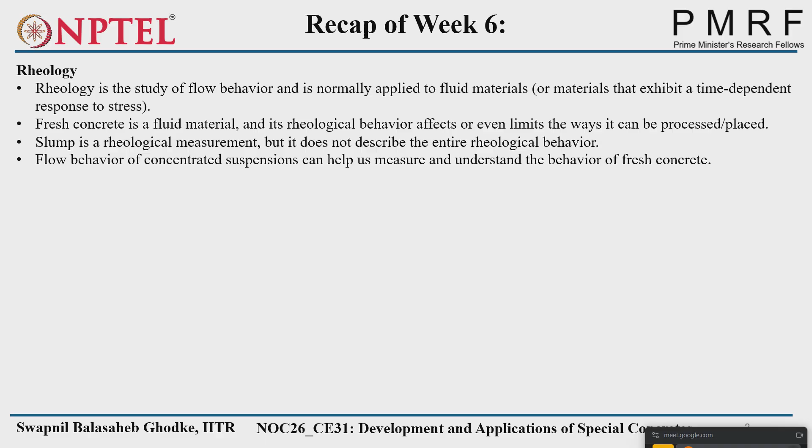So flow behavior of concentrated suspensions can help us measure and understand the behavior of fresh concrete. So how do we measure the flow of concrete or its rheological properties?

Flow is typically measured using the shear parameters of stress and strain rate. Shear parameters mean whatever cementitious material we have will provide some rotation or shear torque over it. That is called the strain rate, and we measure stress - what stress is required to break down the internal bonding - which we normally obtain from direct viscosity measurement, torque, and flow rate in rheometers.

So viscosity is a representative parameter used to assess flow behavior, and it is defined as the ratio of stress to strain rate. Once we get the torque and strain rate values, these are the raw data obtained from any type of rheometer.

Once we plot that data, we use some equations, called transformation equations, with the help of the Bingham model, Herschel-Bulkley model, or modified Bingham model. With the help of these, we calculate the yield stress and plastic viscosity.

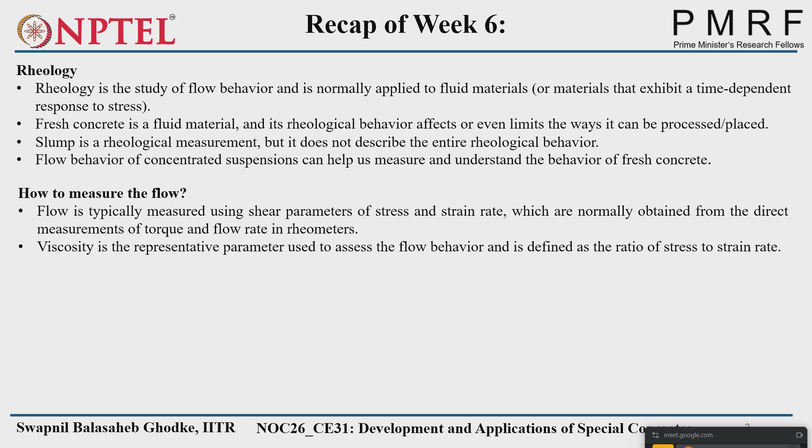And what is the plot we have? Stress versus strain rate - the slope of that plot indicates the viscosity, also called plastic viscosity. It is the resistance to flow.

We saw why we have to understand this in the case of self-compacting concrete, because we require deformability of the paste, while at the same time we require adequate viscosity which will resist segregation of the material. That's why rheology is a very important part of self-compacting concrete as well.

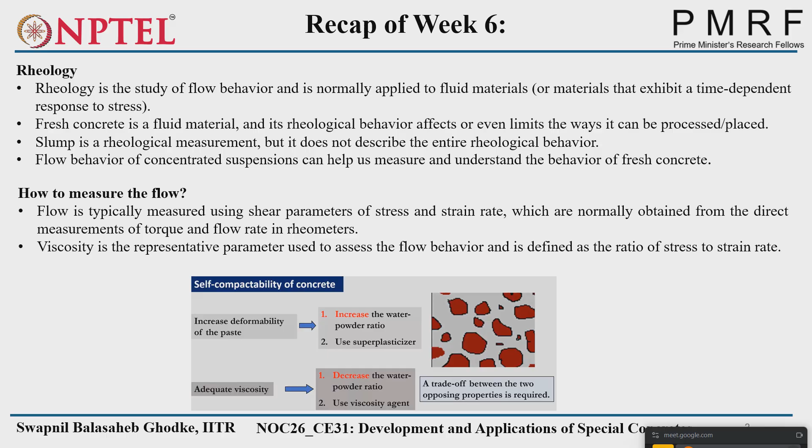How much amount of coarse aggregate, and what size of coarse aggregate we can use in flowable concretes, has been found out with the help of this type of test. In this test, especially near the reinforcement bars, how concrete will flow and how it will block due to obstruction of flow - that we find out with the help of this test.

One cylinder will be there, having a diameter of 100 mm. There is a type of piston which will have a certain diameter of holes, such as 5 mm, 10 mm, and 15 mm. Whatever type of aggregate we are using, we can use that type of hole in the piston. We have the mortar in this cylinder.

We press the piston and see how easily the mortar flows through the holes. This tells us whether the amount of fine or coarse aggregate is sufficient or flowable through the mix. When the mortar is not flowing through the piston's holes and is blocking them, that indicates the coarse aggregates are blocking the flow. That's the possibility of blocking, related to sand volume.

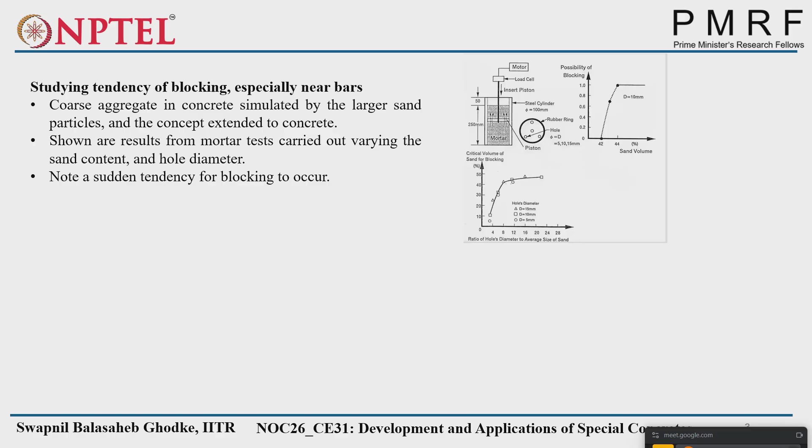Another test is water retention. We saw the slump cone, right? What are the dimensions of the slump cone?

Bottom diameter is 200. Top height how much? 300. Top diameter? 100. Top is 100, bottom is 200, and height is 300 mm. That is our original slump cone.

This is what we call the mini slump cone. It has a top diameter of 70 mm, bottom diameter of 100 mm, and height of 60 mm.

So what we'll do is the same procedure. We put this platform into the center, pour the material in without compaction, and lift the mini slump cone. The automatic flow of the concrete over the surface is allowed. Then we measure the larger diameter first, then perpendicular to that another diameter, and get the average of that diameter.

Then we have to calculate the relative flow area. Based on the average diameter from the flow, we calculate the final area. We know the initial diameter is 100 mm, which gives the initial area. So final area minus initial area, divided by initial area, gives the relative flow area, without providing any compaction or blows to the table.

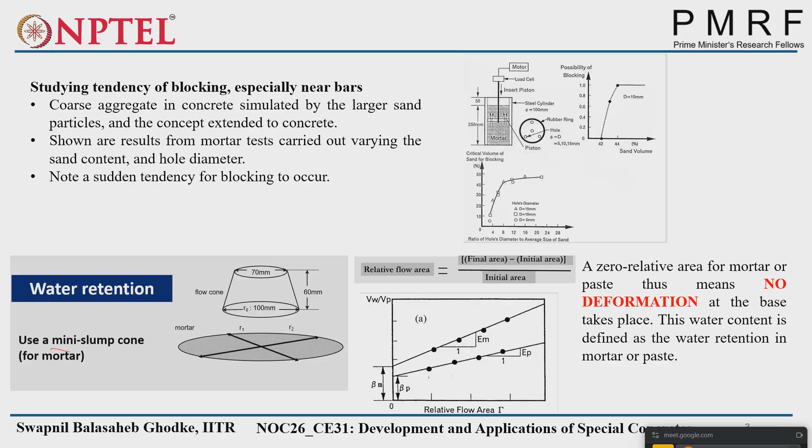One is understanding the amount of sand content and coarse aggregate content, and another is how to identify the water retention of the mortar mix.

Basically, the flow behavior of any cementitious system is a suspension of cement. Suspension means solid particles are either dispersed or flocculated. Dispersed means there is a certain amount of distance between each particle, and flocculated means the particles are closely bonded together.

If you consider the volume of solid particles as Vs, when the volume of solid particles increases, automatically the crowding of particles increases, which increases the viscosity.

Suppose you have 100 ml of water and 5 grams of cementitious particles in one beaker, and another beaker with 100 ml of water and 100 grams of cement. Which one will have the higher amount of viscosity?

Which beaker fluid will have the higher viscosity? The one having a higher amount of cementitious content. Here I am giving the example of cement content, but for any type of solid particle, if the concentration is high...

...it will be responsible for higher viscosity, because a large amount of force is required to get flow, or a large amount of resistance is available to the flow. Viscosity is basically a resistance to flow.

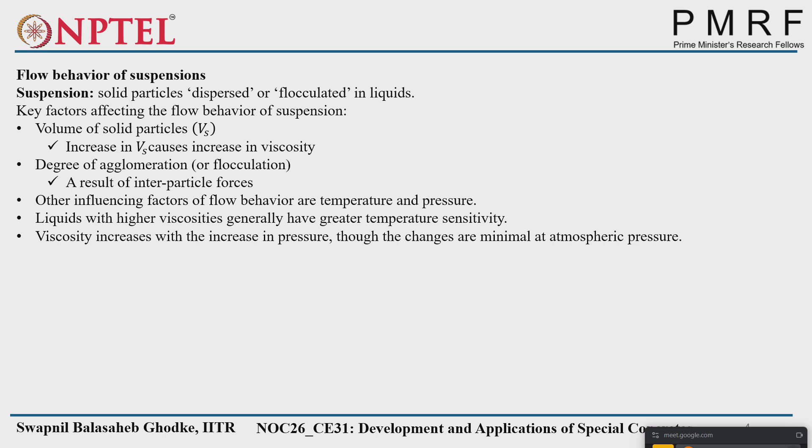Then flocculated suspensions - which type of suspension do we call flocculated? Particles smaller than 1 micron in diameter could result in aggregation or gel formation.

In the case of flocculated suspensions, internal forces are fairly weak, and the stress at which breakdown of the flocculated network occurs is called yield stress. So in which case are the internal forces fairly weak? Which type of force, which type of bonding?

Van der Waals force bonding. You can read more detail about which one? Hydrogen bond.

Yeah, but hydrogen bond is not possible in this case. Most cementitious particles are bonded either by van der Waals force or, due to hydration, through CSH bonds, which are chemical bonds.

And another important sentence is that the stress at which breakdown of the flocculated network occurs is called yield stress. Whatever we measure from the rheometer, that yield stress is basically the breakdown of flocculated networks.

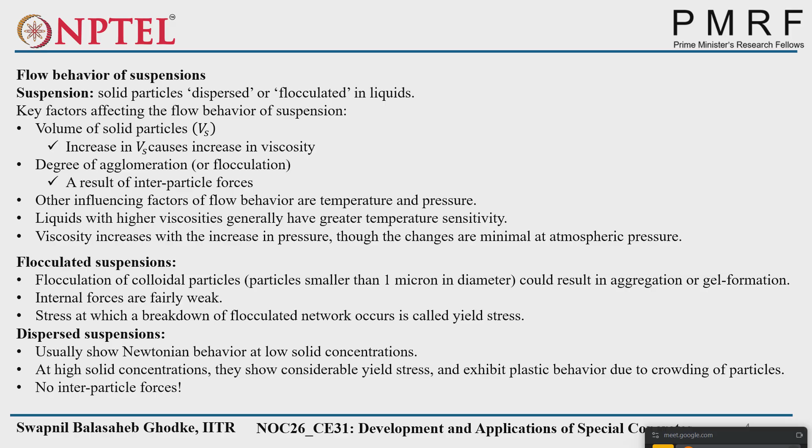In the case of dispersed suspensions, the distance between the particles is high. That's why no interparticle forces are available. So basically, we have to understand the difference between flocculated suspensions and dispersed suspensions. In flocculated suspensions, bonding is there, but it is weak bonding. In dispersed suspension, there are no interparticle forces available at all.

Further, in the case of cement pastes, a dispersed system, if it has higher solid concentration, it is a non-Newtonian system. What are the physical factors that affect it? Water cement ratio, cement grain shape and size, chemical factors, cement composition and its structure, modification due to hydration, mixing and measurement conditions. Can anyone tell me what happens if water to cement ratio increases? What will be the response of the flow in aspect of yield stress and plastic viscosity?

Right, because flow will be more, obviously resistance will be less, so yield stress and plastic viscosity will get decreased. Because of the higher amount of water, whatever solid concentration is already there will convert to dispersed medium, so yield stress will be less. So increasing the water to cement ratio, both parameters will get decreased.

Similarly, cement grain shape and size. Finer the material, higher the hydration mechanism will happen. Irreversible breakdown will be possible. That's why very fast setting will happen, and that's why yield stress will get increased, plastic viscosity will also get increased. Cement grain shape depends on whether particles are spherical or cubical.

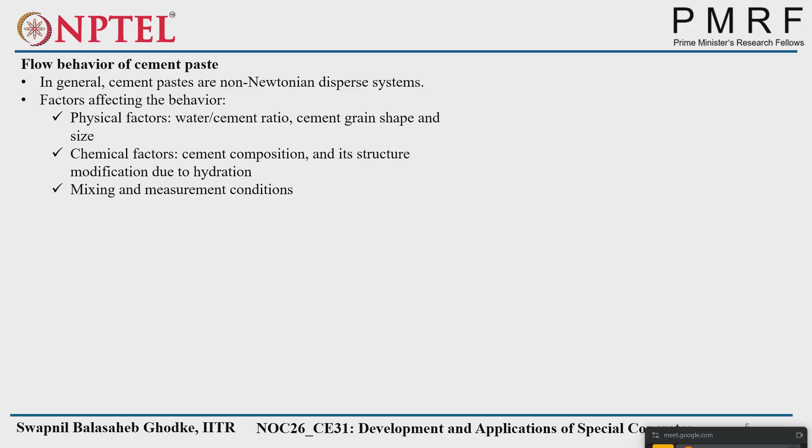Similarly, mixing - if you are mixing the same proportion of mix with a 100 RPM concrete mixer, and then mixing the same material with 200 RPM, both materials will show different rheological behaviors, because shear history is different. Shear history means whatever mixing you are doing, shearing of the material - if mixing with higher speed, there is a possibility of higher hydration or higher heat generation. That's why the material will get stiff as early as possible and show higher yield stress and plastic viscosity at the time of testing. So both parameters are very important: mixing as well as measuring conditions and measuring equipment.

Further, normally assessed using shear rheometers generally operating in rotation. They rotate, giving the shear, and measure the torque and rotational speed as raw data as a result. Then we plot that data and go for further analysis.

Two fundamental types of rheometer are generally used: coaxial cylinder and parallel plates. The sample generally sits in the gap between these two types of equipment. Rheometers either control the stress and measure the strain rate, or control the strain rate and measure the stress.

This type of arrangement we are also using in one of the equipment in testing. Can anyone guess what is that equipment? What does the rheometer actually do - it controls the stress and measures the strain rate. Then another aspect is controlling the strain rate and measuring the stress.

Similarly we can do in CTM. If you remember, we have load control and displacement control, right? In the CTM also we will do load control test or displacement control test. Here it is similar - stress control and strain control. In a similar manner, or similar mechanism, we can use it.

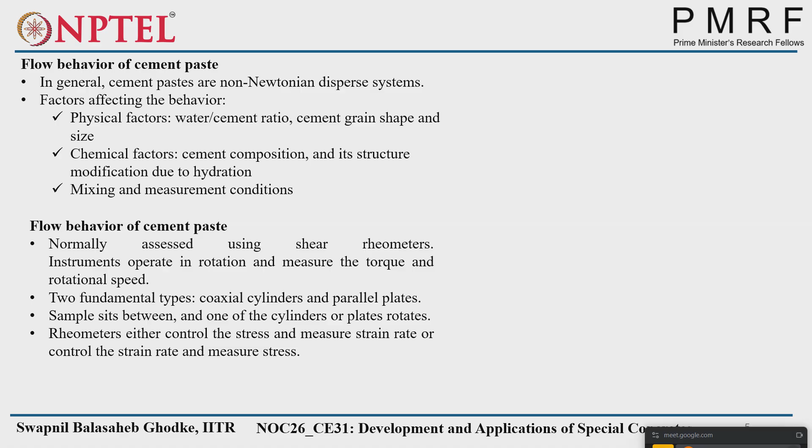These are the two types of rheometer. The coaxial cylinders - this is the gap between the cylinder and the cylinder. This is the one of which rotates, either the outer part will rotate or the inner cylinder will rotate. And this is the torque measuring device.

Similarly, these are the two plates above each other. There is a gap between the two plates, and this black part is the material between that gap. So the shearing of the plates measures the torque and rotational speed.

If we have a stiff material and a little bit flowable material, in which type of rheometer can we use the stiff material, and in which type can we use the flowable material? Can anyone answer?

This is the parallel plate rheometer, two plates above each other, with a gap between them. If we are having too much flowable material, it will not be able to stay in between the plates. So a little bit stiff material we can have between the parallel plates. Whatever stiff material, if you want to measure the rheological properties, we can use the parallel plate. For too much flowable material, we can use the cylinder type or coaxial type of rheometer.

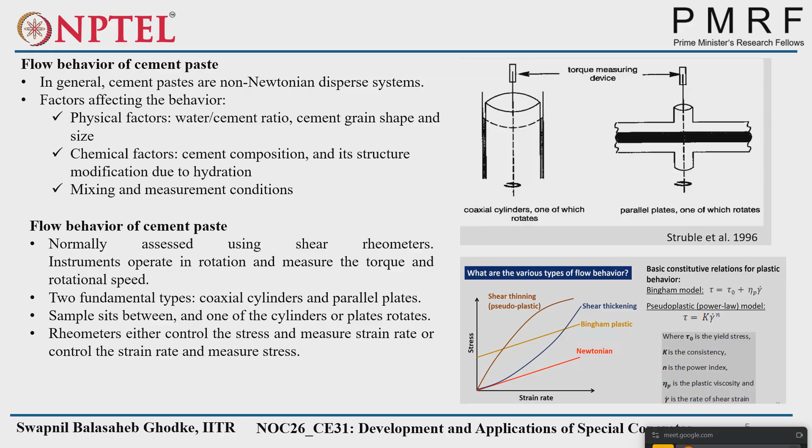So what is pseudoplastic behavior? Shear thinning behavior, we saw in the last plot - pseudoplastic behavior is a shear thinning behavior. And what do we call this one - shear thickening behavior, what is it called? Anyone remember from fluid mechanics? Dilatant behavior - that's what it's called, dilatant.

When we are using a superplasticizer, cement paste shows Newtonian behavior at low concentrations and plastic behavior at high concentrations. So what does superplasticizer do? We saw in the previous 2-3 lectures also, we've been seeing superplasticizer uses since the first week. Can anyone tell me, when we are adding water into the cementitious matrix or any concrete matrix, it will start the hydration, it will start the mixing process. So what will happen when we are adding the superplasticizer? Anyone?

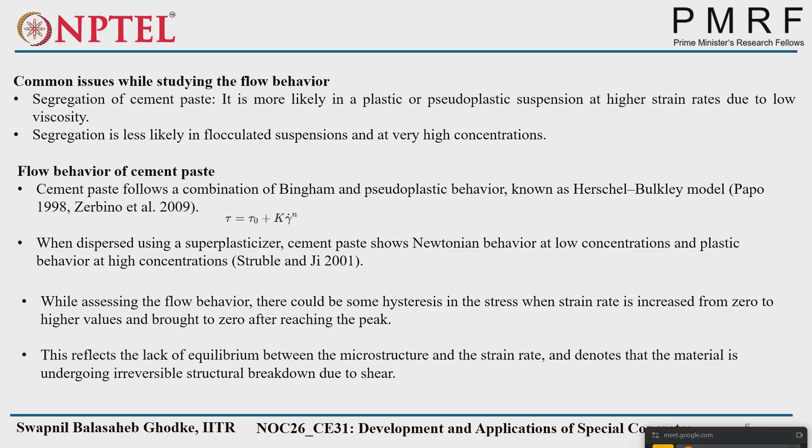So we saw cementitious paste. What about concrete? Flow behavior must be described using yield stress and plastic viscosity due to its Bingham nature.

In the case of concrete, due to the coarser particles, there is a possibility for them to settle down due to gravity, and segregation is more likely to happen during shear. Because as the concrete is sheared or shear rate is applied, there is a high possibility of segregation. That's why another problem is slip.

We have the container. If you saw in the last video, we have a large container, and we are providing shear through the vane shear.

When we are providing the vane shear, there is a possibility that the material, if it is stiff, totally rotates. If it is not rotating inside the material, the whole material rotates against the cylinder. That's why surrounding the cylinder there are strips called aggravated strips. These strips will not allow the whole material to flow or rotate into the cylinder itself. Only the part of the vane which is rotating will break down the material.

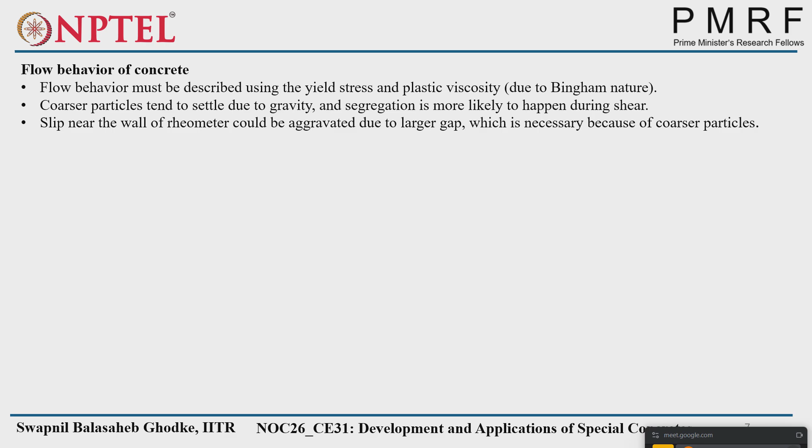So these are the problems observed in concrete. That's why we have to provide the minimum shear rate in the case of concrete, which will mimic the actual procedure or actual protocol of mixing.

Because in concrete there is a wide range of particle sizes used, there is a more complex nature of behavior we observe. So flow depends on the concentration of particles, and the extent of flocculation of cement particles. Flocculation is only important in the case of cementitious particles. It will not happen in inert particles such as fine aggregate or coarse aggregate.

The ranges of strain rates during testing should be low to simulate actual field conditions: mixing, transporting, placing, and finishing. Very important sentence. Why do we have to go for low strain rate? Because at high strain rate, there is a chance for coarser particles to settle down. So that's why we go for low strain rate, and it also simulates the actual field conditions of mixing, transporting, placing, and finishing.

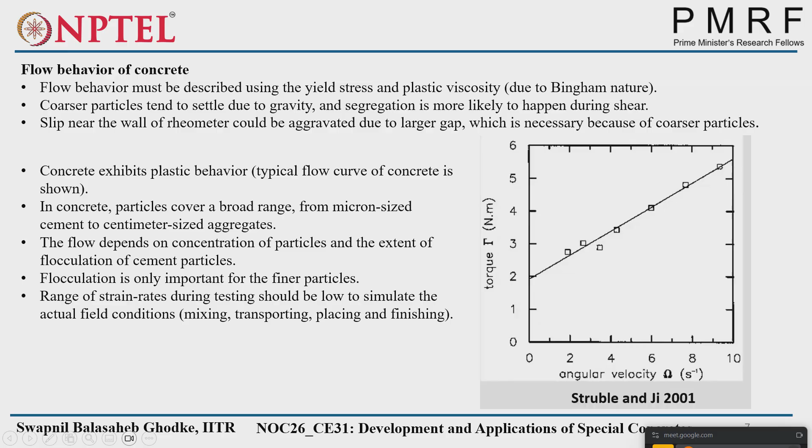So apart from that, what are the different types of factors affecting water to cement ratio? Increasing the water to cement ratio results in lower yield stress and plastic viscosity. This is because of the dispersion of particles, trapped water gets released, which is responsible for increasing the flow, and due to increasing flow, yield stress and plastic viscosity get decreased.

Second, total aggregate content. Increasing total aggregate content results in increasing plastic viscosity. Can anyone tell me how it's possible that aggregate content increases plastic viscosity? Anyone?

Okay, second one: concrete with river gravel, due to its much rounded and smoother surface, has lower viscosity and yield stress. Now you can read both sentences, and tell me how it increases the plastic viscosity.

See, one factor is the concentration of coarse aggregate particles. If the concentration is very high, more force or more resistance will be there for the flow, and less amount of mortar will be available which can carry those coarse aggregates with the flow. So that is called increase in plastic viscosity due to the concentration of coarse aggregates.

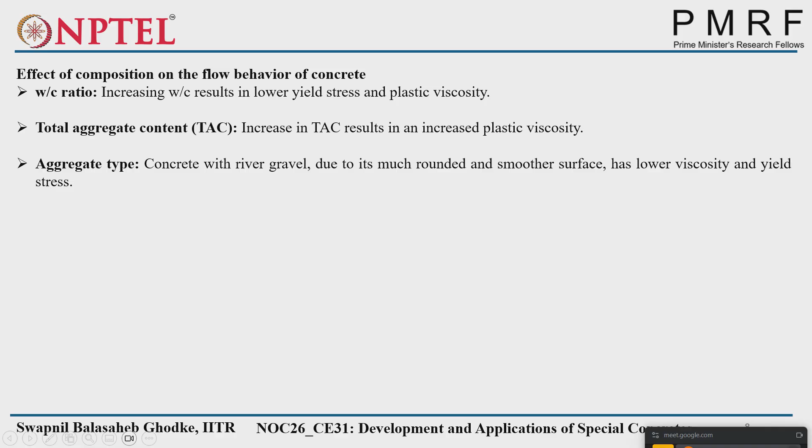But instead of rounded particles, if you use angular coarse aggregate, what will happen? That will create internal friction, because interlocking happens between angular particles, and this increases the plastic viscosity due to internal friction between coarse aggregate particles. So the main reason is interparticle friction causing increase in plastic viscosity. Rounded particles are easier to flow since they have less internal friction. That's why lower viscosity and yield stress occur with river gravel and rounded, smoother surface particles.

Sand content: both yield stress and plastic viscosity follow an initially decreasing, then increasing trend with increasing sand content. The lowest yield stress and plastic viscosity occurs for a sand content of 38%. Now, this statement is totally subjective, because depending on the type of sand you are using, whether it's 38% or more or less, this observation, according to this paper, is based on whatever sand they used for that purpose only, they observed 38%.

But if you are using different types of sand, with different gradations, your value may vary, and the result will also vary for the yield stress and plastic viscosity parameters.

Admixture: fly ash reduces both yield stress and plastic viscosity. We saw several times because fly ash is circular or spherical in nature, so that is responsible for increasing the lubrication and increasing the flow. That's why it reduces yield stress and plastic viscosity.

Super plasticizer and elapsed time - as we are keeping the same material, suppose now one more study is there in the rheological aspects. You have the concrete or cementitious material at the same rotating speed or shear rate, and you are checking their yield stress at 0 minute after directly mixing the material, then 5 minute, 10 minute, 15 minute, 20 minute, 25 and 30.

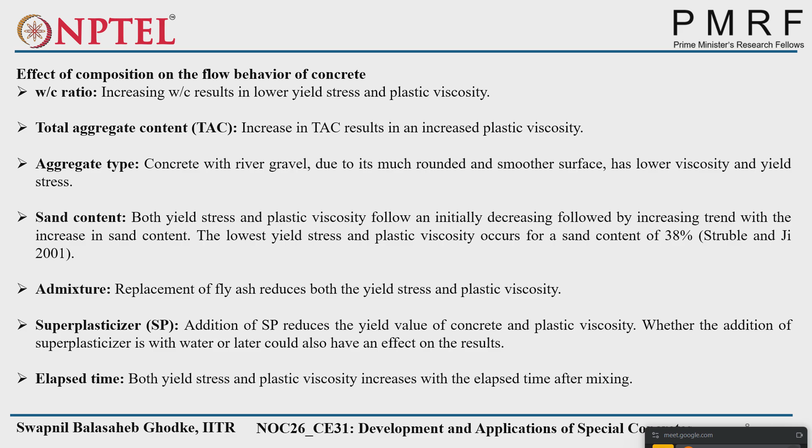So I hope you have understood up to this one, the rheology part. This is the brief introduction of the rheology part. Then we'll move forward with fiber reinforced concrete.

Most of you are well known about fiber reinforced concrete, because nowadays it is very popular. People are using fiber reinforced concrete. So why do we have the need of fiber reinforced concretes? Because our concrete has relatively low tensile strength and low energy consumption capacity, that is called toughness. Can you tell me what is the tensile strength value?

We have a certain relation with respect to the compressive strength in the code. Anyone remember? 5000 under root of FCK - that is Young's modulus, na? Okay, 0.7 root FCK.

And another thumb rule is also there. What is it called? How much is it? One tenth of the compressive strength - you will find this thumb rule actually. We call it the tensile strength of our concrete matrix.

So these are the two problems: already we have one tenth of the tensile strength compared to compressive strength, that is very low, and low energy consumption capacity. So why do we need tensile strength and why do we need energy consumption capacity, that is called toughness? Because if you want the concrete to behave perfectly into the flexural condition as well as into the earthquake loading condition, that is the ductility point of view, we need these parameters more efficiently - tensile strength and toughness.

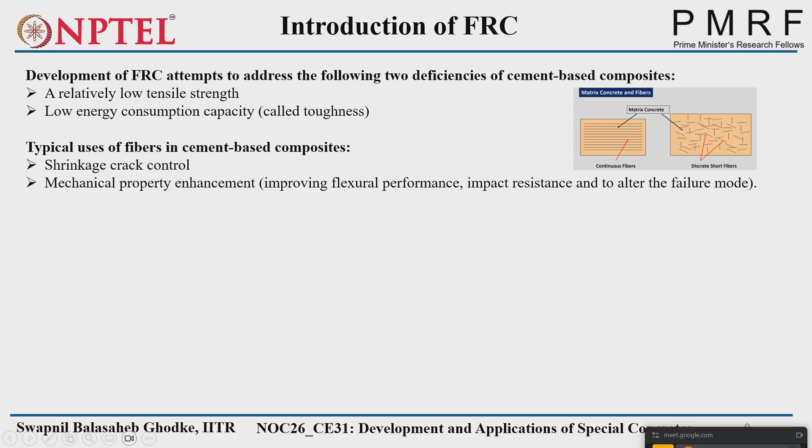So what do fibers do? Fibers may be continuous long fibers, or short fibers which can disperse into the concrete matrix in a random orientation. Typical use of fibers in cement matrix: mainly shrinkage control or shrinkage crack control, mechanical property enhancement, improving flexural performance, impact resistance, and altering the failure mode. It's very important - it alters the failure mode. We'll see how it alters.

So what is the difference between fiber reinforcement and conventional reinforcement? Fibers are generally distributed throughout the concrete, whereas reinforcing bars or wires are placed only at predetermined locations, because bars provide only tensile locations, the tensile zone of the concrete. Suppose we have a beam - we have the compression zone at the top and tensile zone at the bottom, so most of the bars will be at the bottom part of the beam. Forget about curtailment and such things, just consider we have bars at the bottom.

We don't - if we are doubly reinforced, even though we have a less number of bars at the top and a large number of bars at the bottom. But what happens if you are using fibers? They completely disperse throughout the concrete matrix and improve the mechanical property. Fibers are generally short, discrete, closely spaced, and randomly distributed throughout the matrix. Presence of fibers in concrete modifies the properties of the concrete. This is quite in contrast to reinforced concrete, because reinforced concrete does not modify the properties of concrete - it only modifies the tensile behavior, or resists flexural forces.

It will give the flexural strength to the concrete. So obviously, it is possible to have fiber reinforced concrete used as a part of conventional reinforced concrete, meaning you can use them together. You have the bars also, and you can use the fibers also.

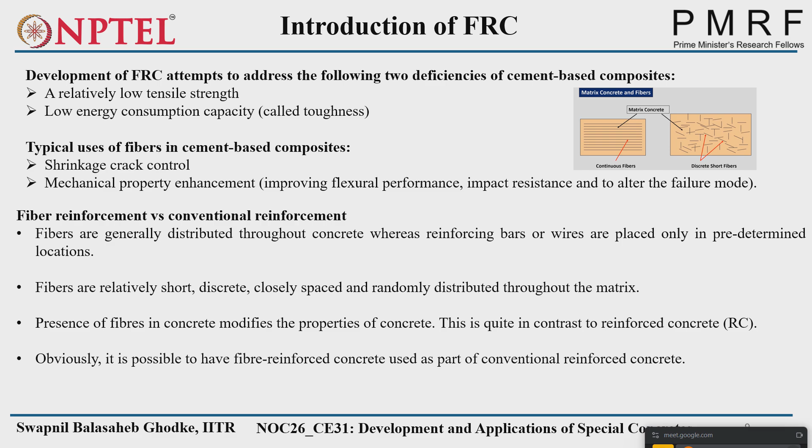So more effective use of fibers. The main factors that control the performance of the composite material are physical properties of the fibers and matrix, and strength of bond between the fibers and matrix. Physical properties mean length, diameter, type of the fiber. We have to understand these, because all types of fibers will not behave equally or show similar performance or efficiency in the concrete matrix. So that part we also have to consider.

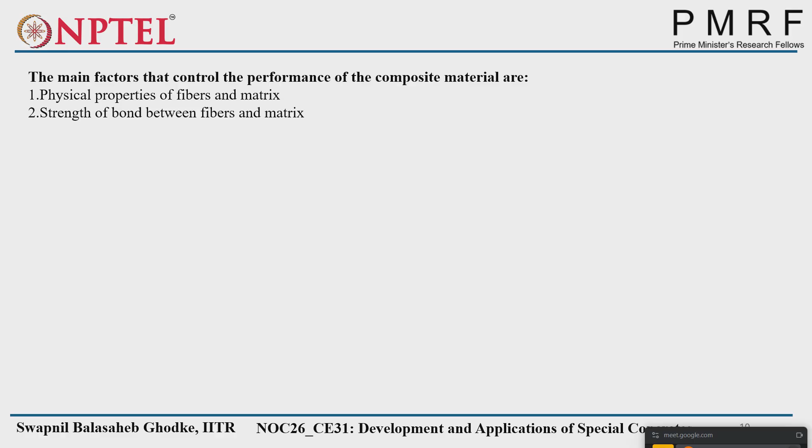Strength of the bond between the fibers and matrix: we'll see how we'll measure the strength of the bond. That is also important, because if you have a fiber in the concrete matrix, maybe you are aware of the pull out test. We'll do it for the concrete rebar, steel rebar, to see the bonding between the rebar and the concrete matrix. In a similar manner, we also have to understand how the bond is observed between the fibers and the matrix, because fibers are short and small in diameter. That is very important to understand the bonding properties between the fiber and the concrete matrix.

Another aspect is the fiber volume ratio. If the fiber volume is low, moderate, or higher, that also affects the properties of the concrete matrix. So what is the fiber volume? It is the ratio of the fiber volume VF to the total volume of the FRC, that is, fiber reinforced concrete.

At low VF, fiber volume, the addition of fibers contributes mainly to the toughness. And at a higher VF, the tensile strength of the matrix can be enhanced and the failure mode can be changed. How much lower and higher the value is, we'll see in the next slide.

Can anyone tell me what is toughness? Actually, what does it indicate in the load deflection graph? Anyone? Right, it is represented as the area under the load deflection curve.

But up to what point, that we'll see. We cannot get the whole area. We'll calculate up to a certain displacement or certain deformation point. Up to that point only we'll measure the area under the load deflection curve, and that is what we call the toughness of that particular concrete matrix.

So the properties of the matrix influence the bond with the fibers and the mechanical properties of the fiber reinforced concrete. Obviously, if we have different types of material constituents, we'll have different bond properties. That's why FRC can be modified using mineral admixtures such as fly ash, silica fume, and metakaolin, because these mineral admixtures are responsible for giving strength to the matrix. Whatever pores are there, even surrounding the fibers, will be filled with additional CSH gel and will give more bonding. That's why mineral admixtures are recommended for use in fiber reinforced concrete.

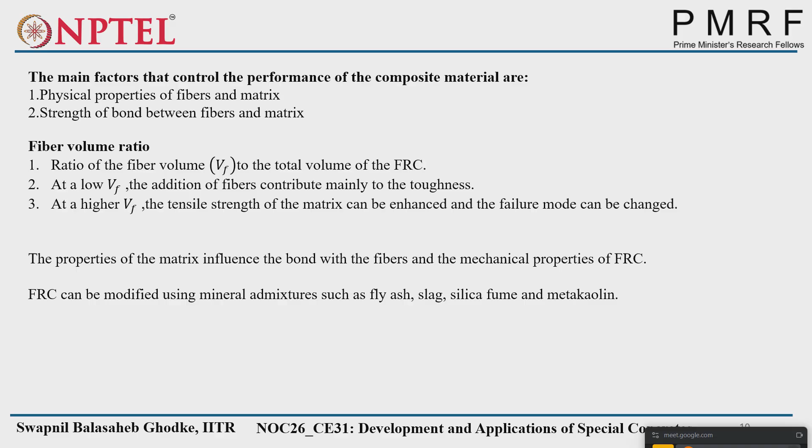So, classification: I am discussing the classification. Low fiber composites are called so if fiber content is less than 1% of the total concrete matrix, and that is mainly used to reduce shrinkage cracking. If the fiber volume is between 1 to 2%, that is called moderate fiber composites, and it exhibits improved mechanical properties and can be used as a secondary reinforcement, meaning you already have the rebar reinforcement, and this fiber is called the secondary reinforcement.

In the case of high performance fiber reinforced concrete, if the volume fraction of fiber is higher than 2%, it not only improves the mechanical performance, it exhibits strain hardening behavior due to high fiber content, generally more than 5%. Does anyone have any idea about strain hardening and strain softening behavior?

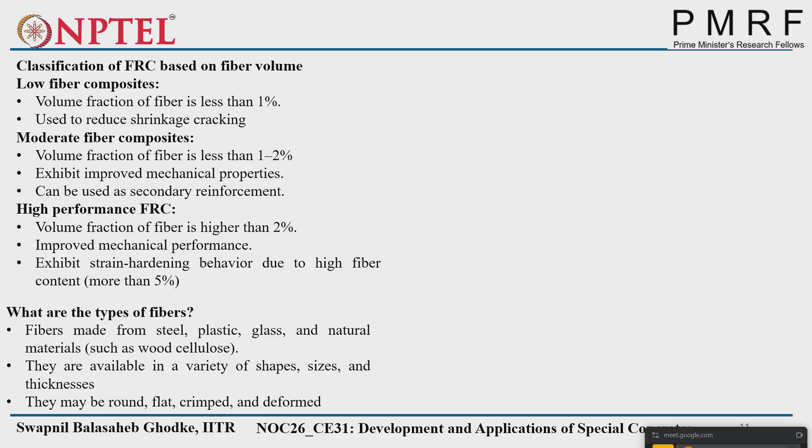We'll see strain hardening and strain softening behavior. So what are the types of fibers? Steel, plastic, glass, and other natural materials such as wood and cellulose. They are available in a variety of shapes, sizes, and thickness. They may be round, flat, crimped, and deformed.

So, these are the concrete aggregates. Suppose these are the voids, and these are the fibers. You see, these are randomly oriented. So voids and microcracks serve as the crack initiators. That's why we have to be careful about the voids, the amount of voids. Less the amount of voids, less the possibility to have microcracks or crack initiators.

Fiber presence prevents crack elongation and increase of crack width, increasing strength by the fiber spacing theory. Suppose you have voids, and you have one fiber from this side and one fiber from this side. This void allows a certain amount of widening because of crack initiation, up to this point, so it reaches here and here. Further widening will not be allowed by this arrangement of fibers. But what happens if you have voids here and only here you have the fiber, with no fiber on this side? If it is widening, do you think it will be resisted by the fiber?

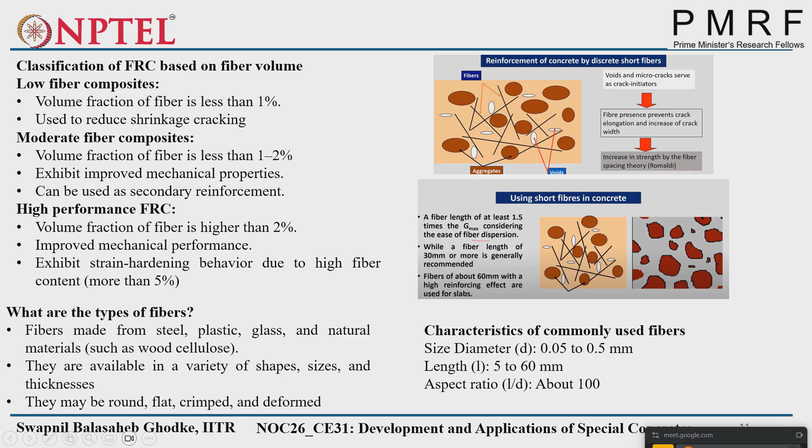So what are the common characteristics of the fibers? Diameter 0.05 to 0.5 mm. Length will be 5 to 60 mm. Aspect ratio is one of the major important parameters, called the length to diameter ratio of the particular fiber, and that will be about 100.

Now we'll see the bonding mechanism. This is the fiber, this is the concrete matrix. Half of the fiber is embedded into the concrete matrix, that we call L by 2. This is the diameter of the fiber, and this is the total length L. This is tau, the stress generated surrounding the fiber, in Newton per mm square. This is the surface area, calculated as pi d into L by 2, which gives us the force.

The tensile force you are applying is sigma into pi d square by 4. If the tensile force is more than this resisting force surrounding the fiber, tau into pi d into L by 2, then debonding will happen. If the resistance is more, breaking of the fiber will happen — that's called failure by fiber in tension. When resistance is more and tensile force is less, the fiber in tension will fail. But if resistance is less and tensile force is more, the interface bonding will fail, debonding will happen, and there is a rare chance the concrete itself will fail. So this is the tensile force and this is the resistance force, where sigma and tau are the tensile strength of the fiber material and the bond strength between the fiber and the matrix respectively.

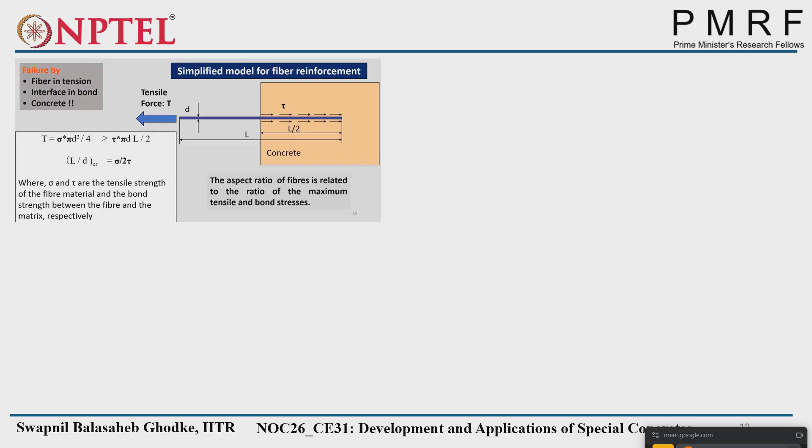You have to find out the bonding-debonding properties of the particular fiber. That's why if you see steel fibers, they will have some hook at the bottom or top, or an alternate zigzag pattern arrangement. It is rare to use a simple linear fiber. Similarly, in rebar also you will have TMT rebars, which gives additional bonding with the concrete.

What are the advantages and disadvantages of fibers? Since fibers are generally distributed throughout the concrete, many fibers are inefficiently located for resisting tensile stresses. That's why distribution is very important. Spraying the fibers leads to 2D random orientation, whereas pre-mixing them during batching leads to 3D random orientation. Spraying means after the concrete is prepared, we spray fibers over it and mix with a spatula or similar tool. Pre-mixing means we mix with the dry materials itself, which gives 3D random orientation.

The efficiency factor to take care of stresses depends on the fiber length, critical embedment length, and orientation. Critical embedment length is shown here as L by 2. Suppose there is no debonding possible for a fiber with L by 2 embedment length, and we provide another fiber in the same concrete matrix with L by 4 length.

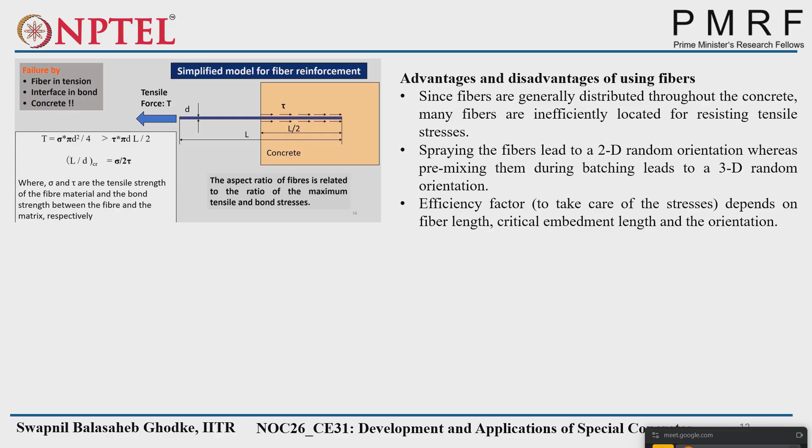So which one will fail, or will it also resist debonding? We have one fiber with L by 2 length and another with L by 4 length—which will fail in debonding? Obviously L by 4, because whichever has less embedment length or critical embedment length will fail first—debonding happens easily, easy to pull out. Even in labs, in the normal rebar debonding test, if the embedment length is less, debonding happens easily. It is similar for fibers.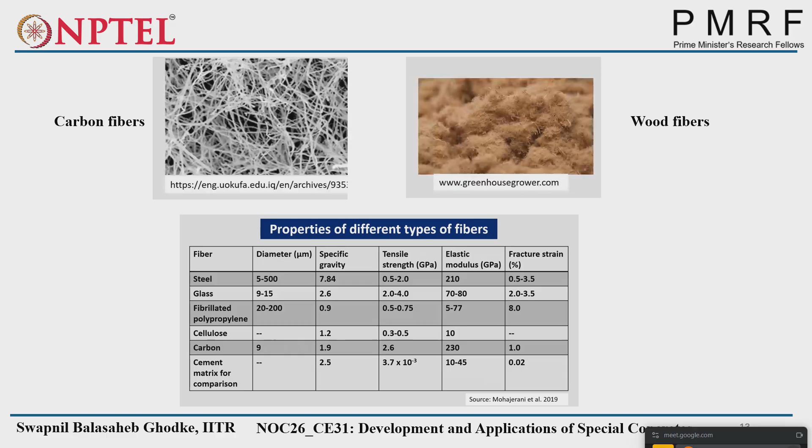So this is the general idea about fiber reinforced concrete. Now we'll see that in most constructions, we are using steel fibers.

Can anyone tell me, since we are using steel fibers, is there any possibility of corrosion of the steel fibers? Why? Right, because we have alkali present in the concrete matrix due to calcium hydroxide. Because of that, it creates an oxidizing layer surrounding the steel fibers, which does not allow direct contact with weather or water. That's why it provides some protection against corrosion.

So, steel fiber reinforced concrete: addition of fibers reduces the workability. It's very important when using fiber content that you modify your mix accordingly. How do we modify it? Because it reduces workability. Why does it reduce workability? Any idea?

It reduces workability because the overall specific surface area increases due to the fiber length and smaller diameter. As area increases, more mortar is required to coat the surrounding matrix and fibers, and to get them into the flow along with the matrix. So higher cement content, water, and sand content are required for the same consistency compared to normal concrete.

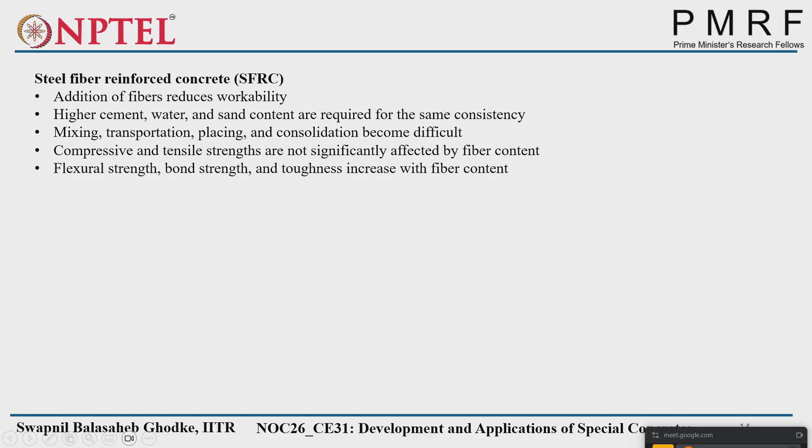The mix should be sufficiently cohesive to hold fibers without segregation. Sufficiently cohesive means higher fineness should be there, which can carry all the fibers - similar to how higher fineness is required to carry coarse aggregates along with the concrete matrix. Similarly, higher fineness and higher consistency are required to carry the fiber matrix along with the concrete matrix, so that no segregation happens between the fibers and the concrete.

Fibers increase the total surface area of the mix, thereby increasing the demand for fines. For optimal performance, finer material content should increase with the fiber surface area. How much will it increase? The fiber area increases with the fiber dosage and decreases with the fiber size.

Total fine material - the range given is less than 300 micrometers. This is called the total fineness material in fiber reinforced concrete, that is cement, mineral admixtures, and fine aggregates, and it should be at least 400 kilogram per meter cube. We saw this type of range in self-compacting concrete also, where we called it the fineness of material below a certain sieve size.

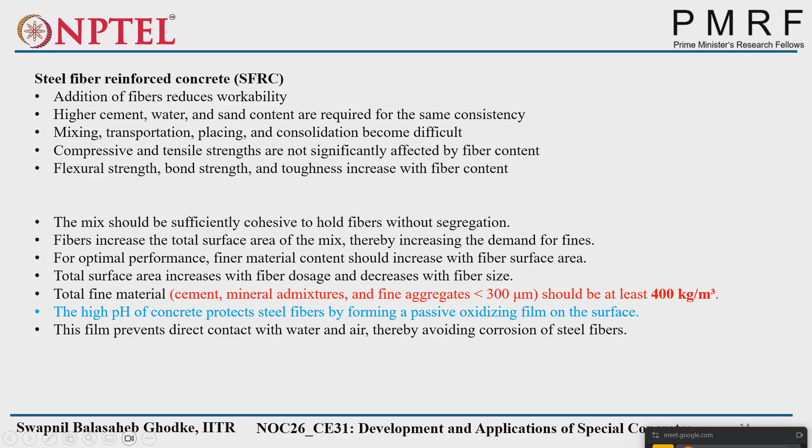The high pH of concrete protects steel fibers by forming a passive oxidizing film on the surface. This film prevents direct contact with water and air, thereby avoiding corrosion of steel fibers.

Some other key observations regarding mix proportioning: aggregate grading should be biased towards the finer side, meaning more fines should be present, down to 75 micrometer. Use natural fine aggregate if unavailable. Improve grading by adding 4 to 8% of crusher fines.

Increasing fiber content reduces fiber spacing, limiting the maximum size and proportion of coarse aggregates. Obviously, increasing fiber content causes more crowding of fibers, so spacing between each fiber gets reduced. With more crowding, if you want to maintain the same consistency, the maximum size and proportion of coarse aggregates must be reduced.

Water demand content increases with fiber content. How much? Approximately 20 kilogram per meter cube per 1% fiber - this is a thumb rule. But it should not go beyond 180 kilogram per meter cube. The range is between 140 to 180 kilogram per meter cube.

Accordingly, we have to make changes to our concrete mix design by using superplasticizers or other admixtures. Water content should be minimized using water reducers and superplasticizers, at about 0.4 to 1.4% of binder.

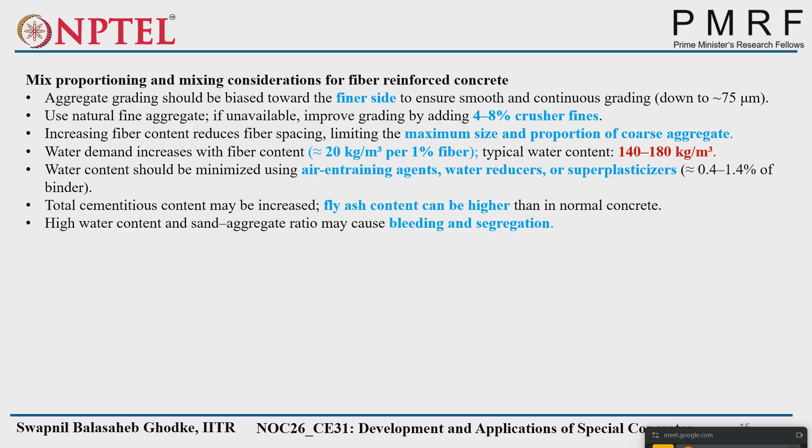For mixing with fiber content of 0.5 to 2%, normal mixing methods can be used with thorough mixing - meaning whatever mixing method we use for traditional concrete, a similar method applies: dry run, then adding water plus SP content together or in a different manner. But mixing time will be higher - that's why it's called thorough mixing, meaning mixing time will be higher.

Mixing energy may increase by 2 to 4 times using forced-action mixers, meaning RPM will be high. Then we have to take care about uniform dispersion of the fibers also - for that purpose, dispensers or bundle fibers with water soluble adhesives can also be used.

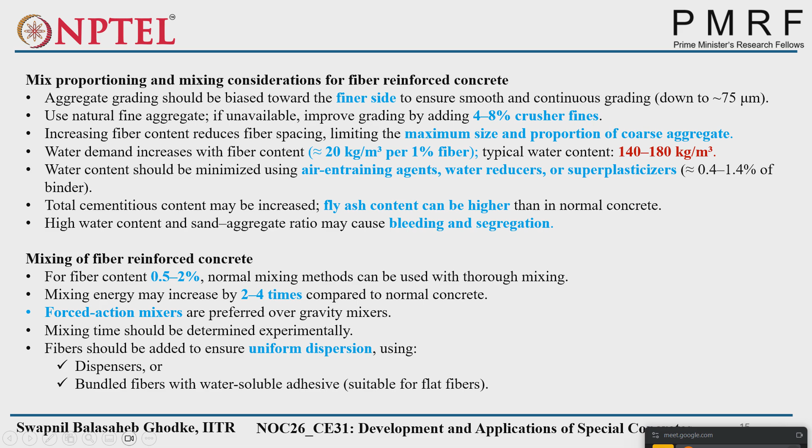Fibers are added in an agitating truck. Concrete should be mixed at high speed so fibers don't settle down - mixing should be higher in agitating trucks. Mixing time for fiber reinforced concrete is typically 15 to 25% higher than plain concrete. Mixing efficiency depends on mixer RPM, wear of blades, fiber type, and dosage.

Longer fibers and higher aspect ratios increase the risk of fiber balling. What is fiber balling?

If mixing will not happen properly, not having the proper mixing speed, there is a possibility to have the fibers settle down. And if the dispersion of the fibers is not proper, the fibers will interact with each other close together and it will create a ball like structure, that is called fiber balling.

Dispersion is very important, and there is higher possibility of balling in the case of longer fibers and higher aspect ratios. Aspect ratio means length to diameter ratio. There is a possibility of fiber balling with longer fibers. That's why there is a recommendation to use short fibers, except in the slab, where only longer fibers are recommended. In other concreting, short and discrete fibers can be used.

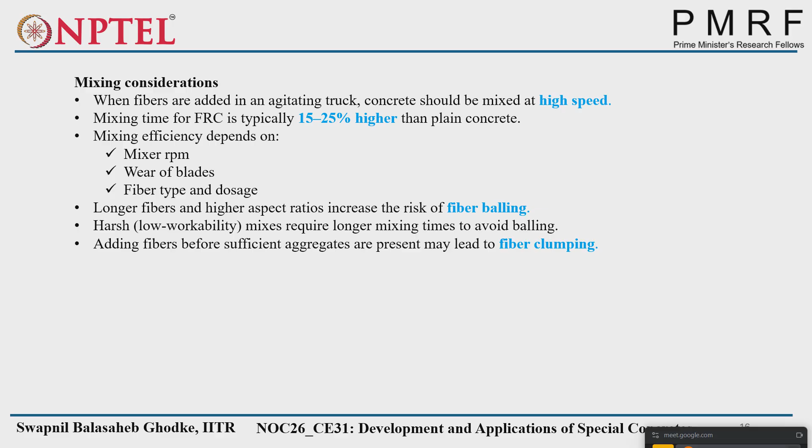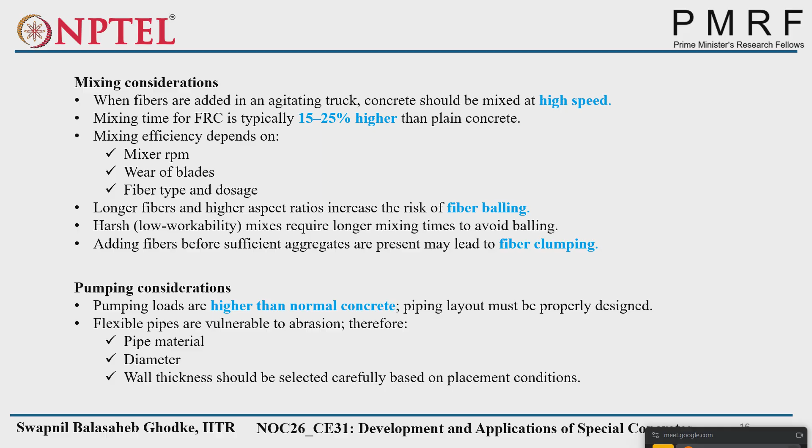For pumping, viscosity will obviously be high because of the fiber content, so pumping pressure will be high compared to normal concrete. The pumping layout may be different because if you are using steel fibers, there is a possibility of wearing and tearing of the pipe. That's why pipe material, diameter, and wall thickness should be selected carefully based on the placement conditions. These are the important factors we have to consider apart from normal concreting, because of the inclusion of fibers.

Then how do we check the homogeneity of the fiber dosage? For that purpose, one test has been recommended. You prepare the mix with fibers, take a known volume of the mix, then use a sieve. You put all of that fresh mix over the sieve, then remove it so the fibers are separated, then dry and weigh them.

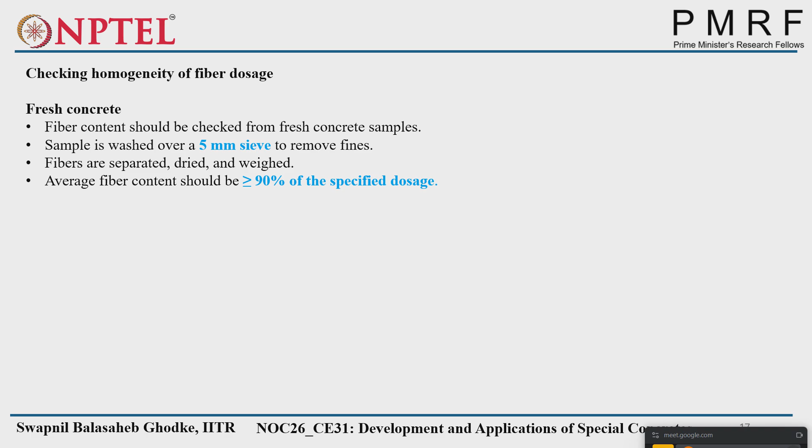Whatever weight you get, suppose you use 1 kg of fresh mix with 1% fiber provided, the average fiber content you get should be greater than 90% of the specified dosage. So for 1%, 0.9% should be there in that fresh mix. Only then can we say the homogeneity of the fiber dosage is good.

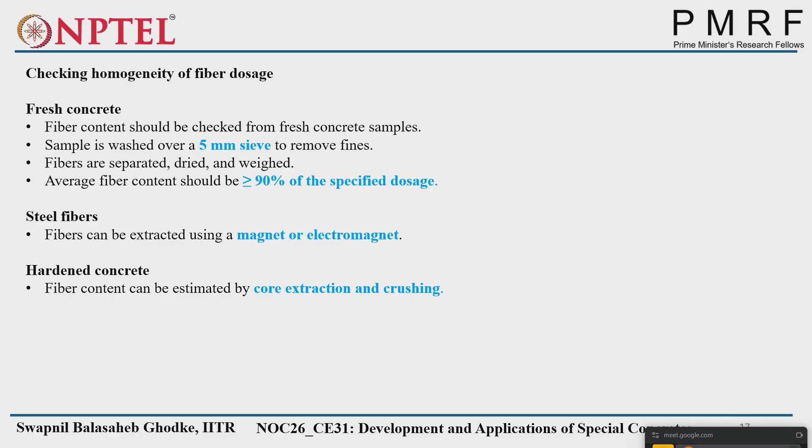Fiber can be extracted using a magnet or electromagnet. This is possible only in the case of steel fibers, which we can remove or get from the fresh matrix. For hardened concrete, core extraction and crushing can be done, then you can weigh and check the average fiber content from that.

So what fiber properties do we ultimately have to see in the hardened state? We saw the fresh properties and mixing. Now we have to see how it behaves in hardened concrete. Mainly fiber reinforced concrete is used with respect to hardened concrete for increasing tensile strength, increasing toughness, and altering the failure mode. Now we'll see how it alters the failure mode.

First of all, we saw that concrete matrix, water cement ratio, maximum aggregate size, and sand aggregate ratio affect fiber reinforced concrete properties. Fiber type, shape, size, length, diameter or aspect ratio, proportion, and fiber orientation and dispersion also affect it.

Similarly, we saw voids are there. If two fibers surrounding the voids are there, that can resist cracking or not allow the widening of the crack. But if the fiber is only on one side of the void, it will not be possible to resist the widening of the crack.

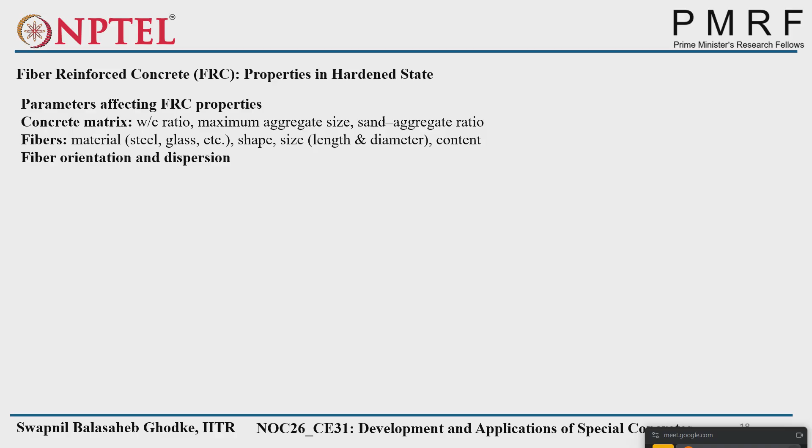In the case of steel fiber concrete, fiber characteristics: length will be 20 to 60 mm, diameter may be 0.3 to 0.9 mm, aspect ratio, that is length to diameter ratio, 30 to 100, fiber content 0.5 to 2% by volume, that is 40 to 160 kilogram per meter cube. Maximum content given is 160 kilogram per meter cube.

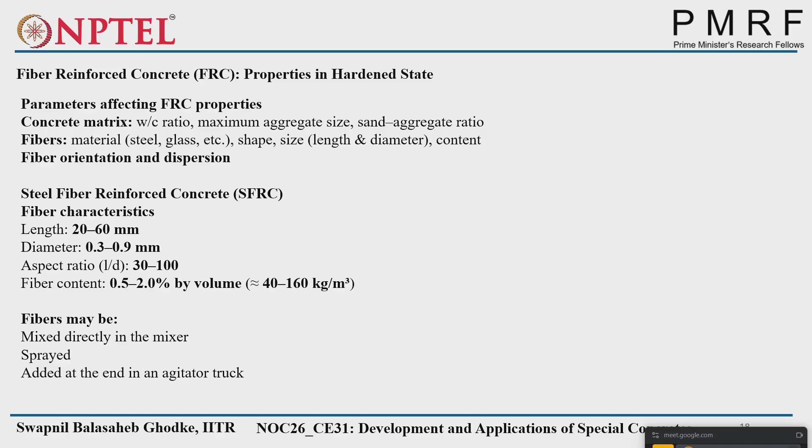Fiber may be mixed directly into the mixer, with dry mixing or spray. But with spray, we have to take care it is properly dispersed and not just on the surface. It can also be added at the end in an agitator truck. In an RMC plant agitator truck, you can add it at the end too, because the mixing speed will be high compared to normal concrete, so it can still properly mix into the concrete.

Workability: addition of fibers reduces workability because of the increase in overall specific surface area. A higher sand to aggregate ratio may be required as fiber aspect ratio increases. Sand to aggregate ratio means we indirectly require higher fineness content, that is higher sand content. Mixing becomes more demanding with increasing fiber content.

Suppose for 0.5% fiber content, 1% fiber content, 2% fiber content - you will require higher mixing energy and mixing speed for the higher fiber content, that is 2%, compared to the 0.5% and 1% fiber content.

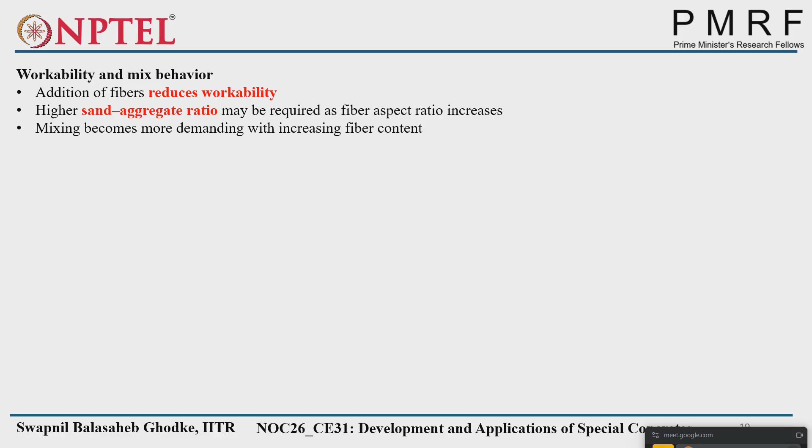Mechanical properties: steel fibers carry tensile stress only after cracking. Tensile strength of steel fiber reinforced concrete is approximately equal to the cracking tensile strength of plain concrete.

Compressive strength is mainly governed by water cement ratio, similar to normal concrete. It is not at all governed by the fiber content or fiber type - compressive strength is not dependent on fiber content. It only depends on water to cement ratio, as we saw in the earlier classes with the plot of water cement ratio versus compressive strength. I hope you remember that plot.

So does anyone remember what the slump value is dependent on? No - water cement ratio is what compressive strength depends on, but slump is dependent on the water content, unit water content. Compressive strength is dependent on water cement ratio.

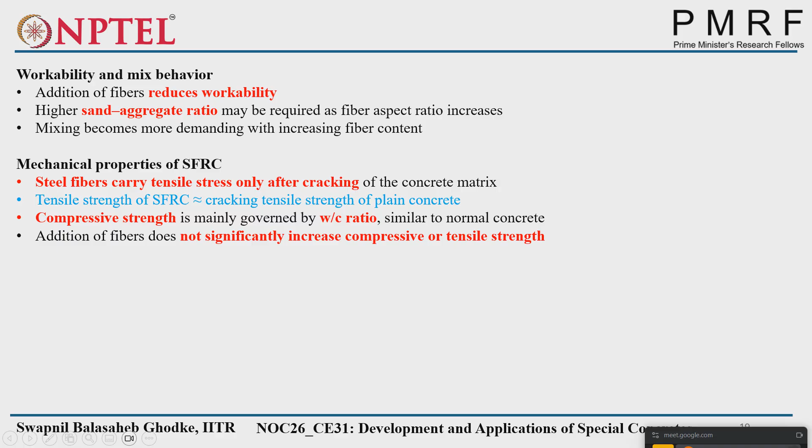So addition of fibers does not significantly increase compressive or tensile strength. So what does it improve? It improves post cracking behavior, which is more important - we'll see with a plot also how it improves. Flexural strength, bond strength, and toughness increase with fiber content. Fiber becomes effective only after matrix cracking. Suppose we have a concrete beam - once the first crack appears, only then does the fiber's effectiveness come into picture.

So what is the key takeaway from these observations? Fibers do not significantly enhance pre-cracking strength but greatly improve post-cracking performance, ductility, and toughness, making steel fiber reinforced concrete fundamentally different from plain concrete.

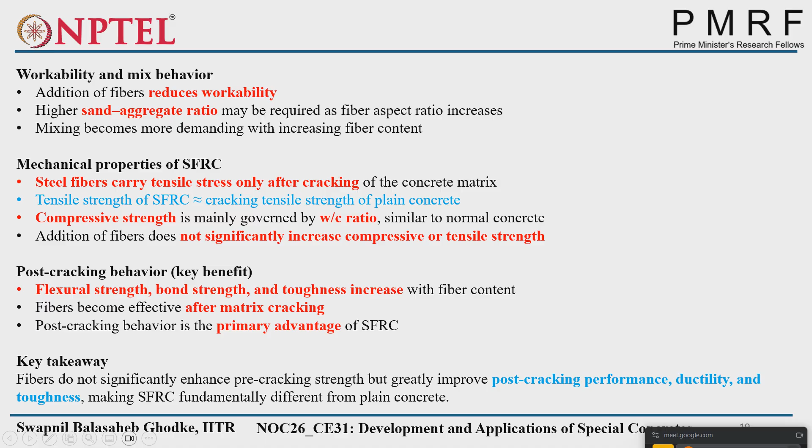Similarly for fiber reinforced concrete, it improves tension, flexure and shear, enhances crack resistance, ductility, impact resistance, and high crack arresting capability, leading to reduced crack width and improved fatigue strength. What is fatigue strength? What is meant by fatigue?

Fatigue load means - not exactly reversal of stresses, but continuous loading. Suppose you have a beam and you want to test it continuously for, say, 1 kilonewton - in cycles, continuous cycles going 1 kilonewton for each second, load is coming repeatedly. That is called fatigue strength, or resistance against that is called fatigue strength.

That is also improved with the help of fibers. So compressive toughness at failure, high flexural toughness in bending, and improved resistance to impact and explosive loads. Impact and explosive loads means, in the case of military operations, you require blast resistant structures. In that case particularly fibers are useful.

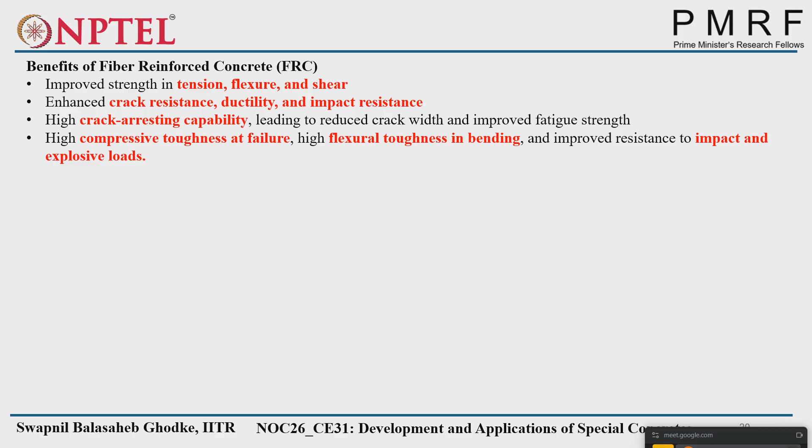So fiber cement bond properties - we saw interfacial bond characteristics and fiber debonding behavior play a critical role based on the embedment critical length. Whatever amount of length is available into the concrete matrix, based on that, interfacial bond and debonding will be observed.

There are two analytical approaches to describe fiber debonding - we'll not go into much detail about these, but there are two: stress-based criteria and energy release criteria. Stress-based criteria shows that debonding occurs when interfacial shear stress reaches a critical value - we saw that explanation with the L by 2 length, tensile strength and resistance strength. Energy release rate criteria: debonding propagates when supplied energy exceeds interface resistance energy.

We have a certain amount of interface resistance energy and a certain amount of tensile stress energy. Based on that, energy release criteria has been developed. Bond properties are commonly evaluated using single fiber pull-out test. Similarly, for the bond pull-out test, we do it for rebars, for single bar only. Here also, single fiber pull-out test will be done.

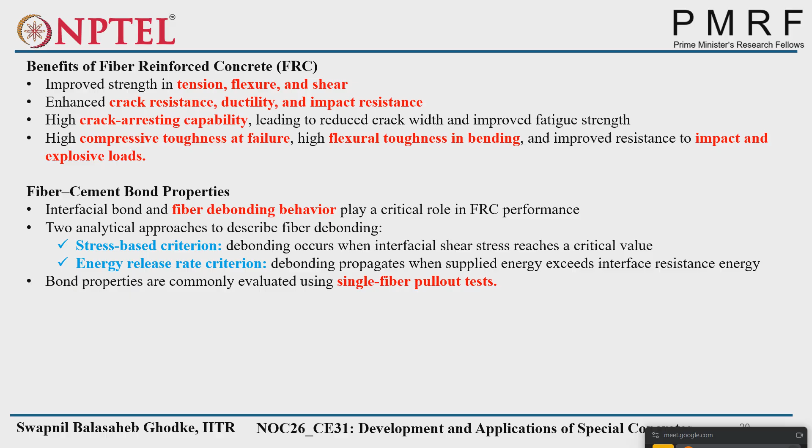But in the case of fibers, you need equipment which has the least count, maybe up to a certain limit. In our institute, a 25 kilonewton UTM has been used for the fiber pull-out test, because higher range equipment cannot be used. Similarly, we use it for rebar, and with the help of this 25 kilonewton UTM, you find out the single fiber pull-out test, and based on that you see strength stress based criteria or energy release rate criteria.

So this means fiber reinforced concrete allows more life basically, or more resistance to the load compared to normal concrete.

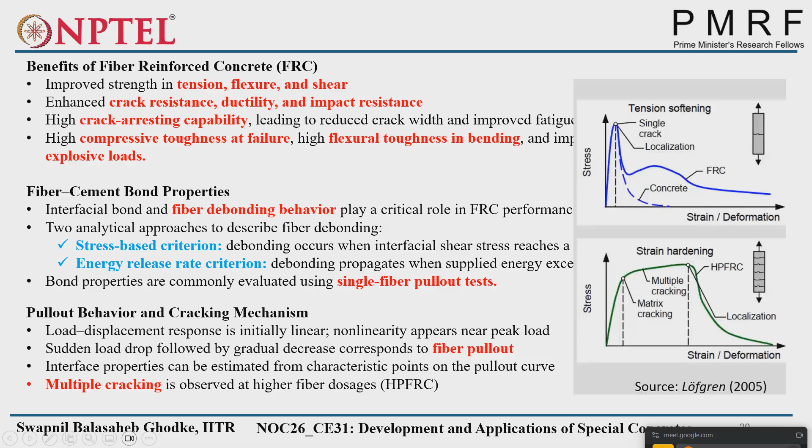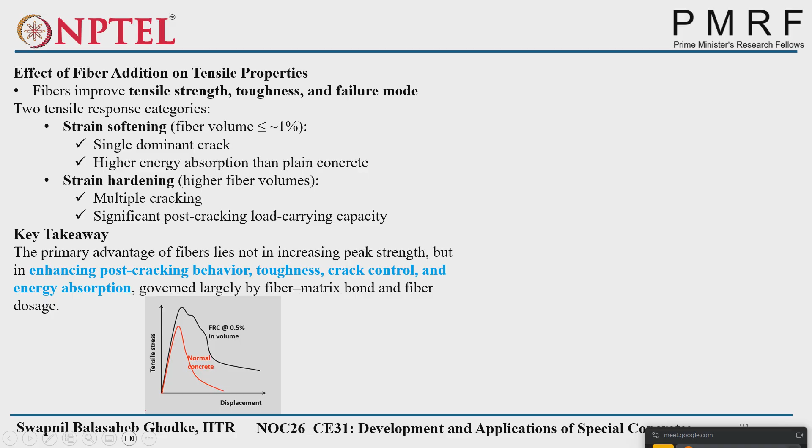We'll see next graphs. So what is the key takeaway from here? The primary advantage of fiber lies not in increasing the peak strength, but enhancing post-cracking behavior, toughness, crack control, and energy absorption, governed largely by fiber matrix bond and fiber dosage.

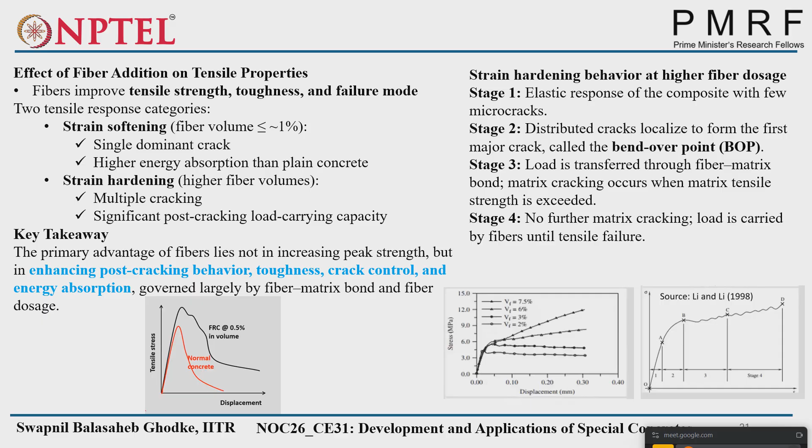Then another aspect of the behavior of fiber reinforced concrete - this is not actually a beam, this is more like a pavement type of thing. This is according to IRC SP 46 2013. They want to see the post-cracking response, so pavement design nowadays also mostly uses fibers along with the main reinforcement. The deflection curve from the third-point loading test has been given in Indian Roads Congress SP 46 2013 - larger deformation at reasonably high stress, resulting in a larger area under the stress-strain or load-deflection curve given by the fiber reinforced concrete.

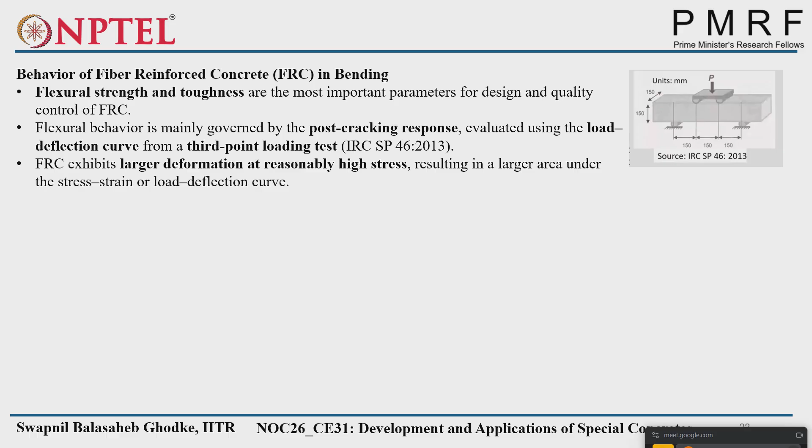So toughness - we saw the debonding, cracking resistance, widening resistance, all those things. Now what is toughness? Toughness in bending: the area under the load-deflection curve is used as an index to estimate the energy absorbing capacity. That is called the toughness of the material. So whatever the area under the load deflection curve is, that estimates the energy absorbing capacity, and that is called toughness. So why is toughness required?

Because it improves the resistance. If toughness is higher, fatigue resistance, impact resistance, and impulse loading resistance will all be higher. And if toughness is higher, we also indirectly say it has better ductility, which will be good in the case of ductile resistance.

So how do we calculate the toughness index? Different codes give different aspects for calculating the toughness index. So to characterize the toughness index in bending, it's the ratio of the area under the load deflection curve up to a specified deflection, to the area up to first cracking, or simply the area under the curve up to a specified deflection.

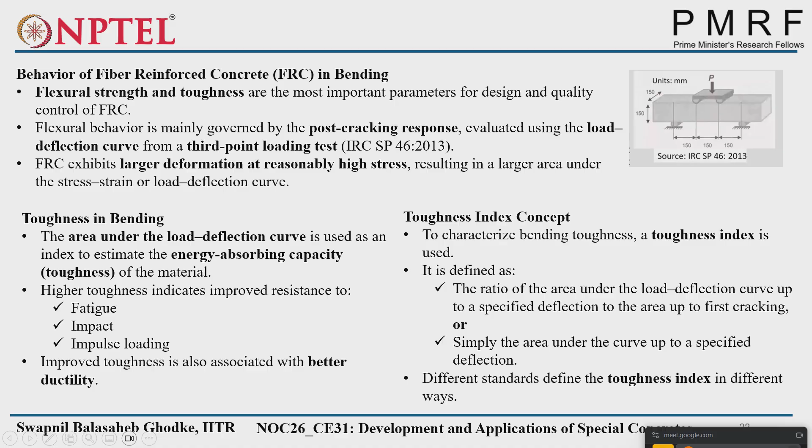But in the case of the Japan Concrete Institute, what it says is they directly define the toughness index as the area of the load midspan deflection curve up to a value of 1 by 150th of the span. Suppose you have a span of 5 meters, divided by 150 - whatever deflection value you get, that delta 150 value, you mark that point, and the area under that curve will be your toughness index.

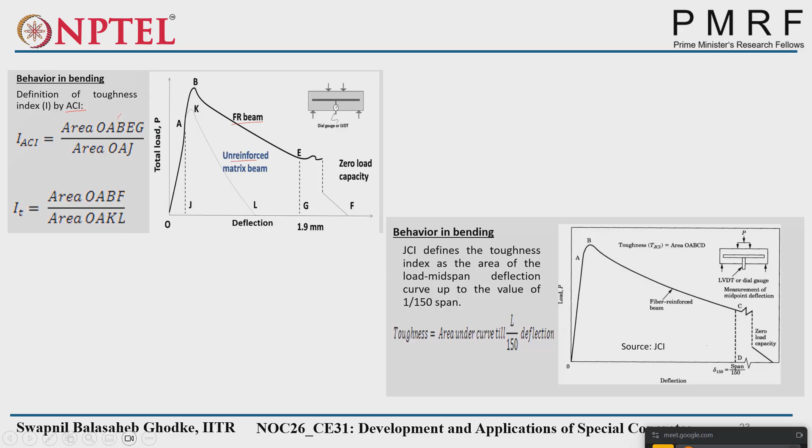So we saw toughness index, we saw all the fiber reinforced properties, types of fibers. Fiber reinforced concrete improves strength in tension, flexure and shear, enhances crack resistance, resists crack widening, improves ductility, impact resistance, and has high crack arresting capability. That's why post peak or post crack behavior is more important. It reduces crack width, increases fatigue strength, compressive toughness at failure, high flexural toughness in bending, and strong resistance to impact and explosive loads, particularly in military operations structures.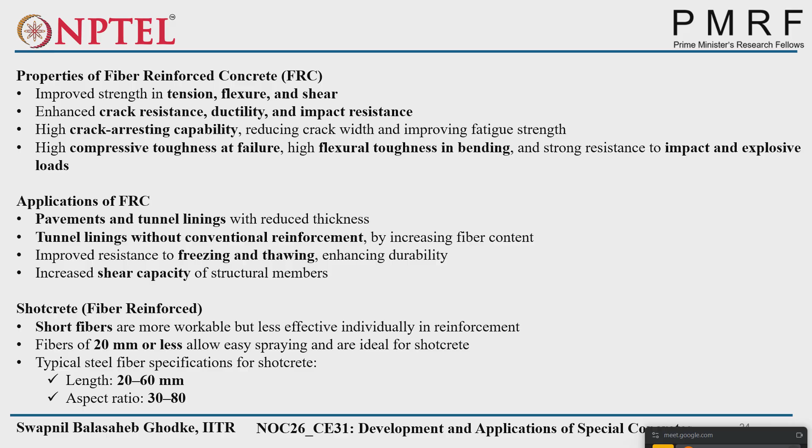So this is the brief overview of week 6, mostly about fiber reinforced concrete and a short introduction about rheology. I hope I was able to give some overview on this. If anyone has any doubt, please let me know, otherwise we'll move forward with the questions.

Okay, we'll move with the questions then.

The first question is: in the context of flocculated suspensions, consider the following statements. Statement 1: stress corresponding to the breakdown of flocculated network is called yield stress. Statement 2: flocculation of colloidal particles, that is particles smaller than 1 micron in diameter, results in the formation of gel. So what will be the answer? Both the sentences we saw in the brief overview. Both are true, okay, any other answer?

Both the statements are true actually. We saw both statements in the brief overview also, because stress corresponding to the breakdown of flocculated network - the flocculated network has internal forces but weak internal forces. That's why a smaller amount of force allows it to break down, and that smaller amount of force is called yield stress. The second statement - flocculation of colloidal particles, particles smaller than 1 micron in diameter, results in the formation of gel - that is a recommended statement from the code itself.

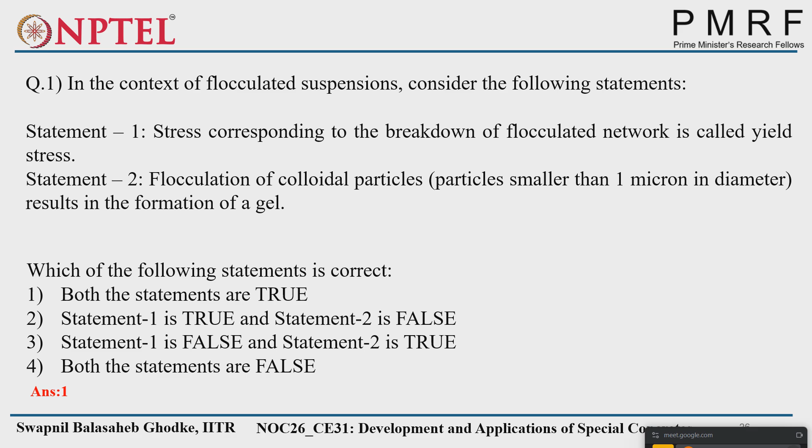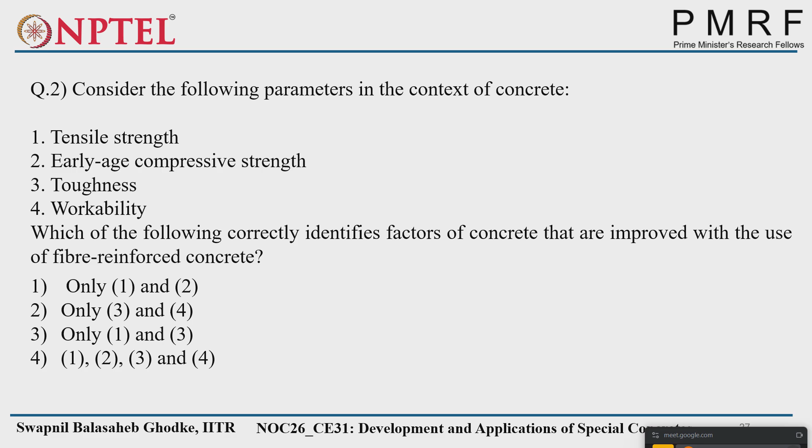Second question: consider the following parameters in the context of concrete - tensile strength, early age compressive strength, toughness, and workability. Which of the following correctly identifies factors of concrete that are improved with the use of fiber reinforced concrete? Which are the factors we can improve with fiber reinforced concrete? 1 and 3, right, right - because tensile strength and toughness we are increasing.

The answer is both are true, because rheology is time dependent. We saw now, because of hydration, yield stress goes on increasing. I gave the example of 0 minute, 5 minute, 10 minute, 15 minute - every time we will get a different yield stress because of the time dependent response, and that time dependent response comes into picture because of the hydration mechanism. So both the statements are true.

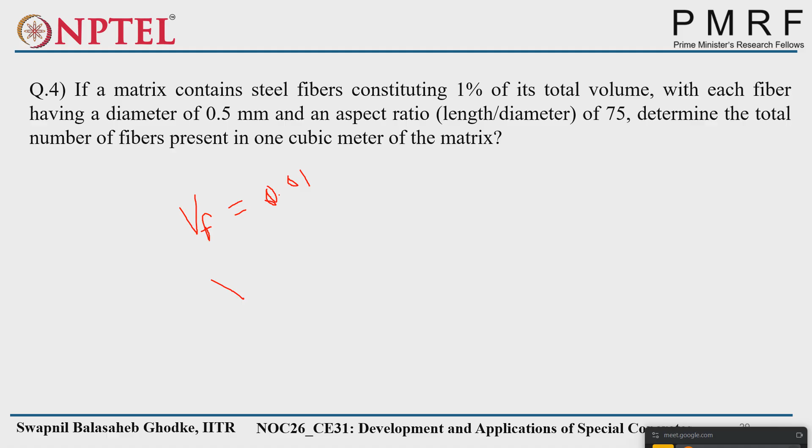VF, VF, VF kitna tha? VF is equal to 0.01, right? And V total fibers we have to calculate. So V total fibers is equal to VF into V matrix. V matrix how much it is? 1 meter cube. So 1 into 0.01, how much it is? 0.01. Simple.

Then n, number of fibers we have to calculate. N is equal to V total upon V single fiber, volume of single fiber. So how much single fiber did you get? So 0.01 upon 7.363 into 10 raised to minus 9. Calculate, you will get the value of n as 1358122.181. Understood or not? Everyone understood? I think some of you got the answer, right? Okay, then we'll move forward if you are satisfied with the answer.

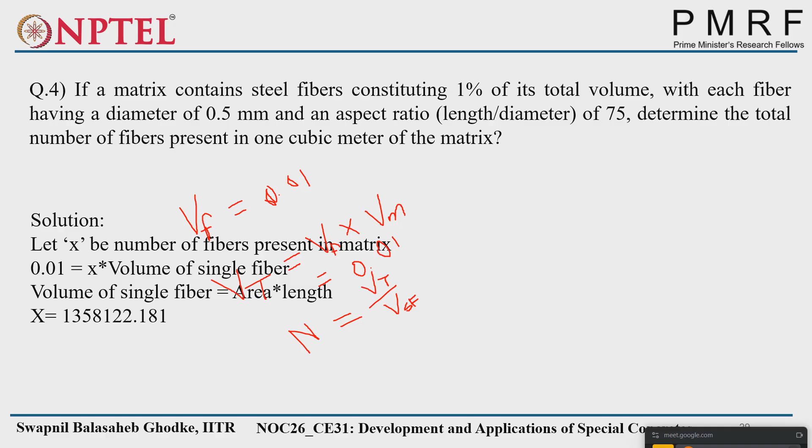So next question, in the context of fiber composites, consider the following statements. Statement 1: utilizing moderate fiber volumes in composite enhances their mechanical properties. Statement 2: incorporating low fiber volumes in composites mitigates shrinkage induced cracking. What will be the answer? We saw the fiber volume in three zones: less than 1, 1 to 2, and greater than 2. So what do statement 1 and statement 2 indicate?

Both true. Correct, both are true. Because moderate fiber volume will be responsible for improving the mechanical properties, higher volume will be responsible for post-cracking behavior and strain hardening, and low volume fiber is only for shrinkage induced cracking resistance.

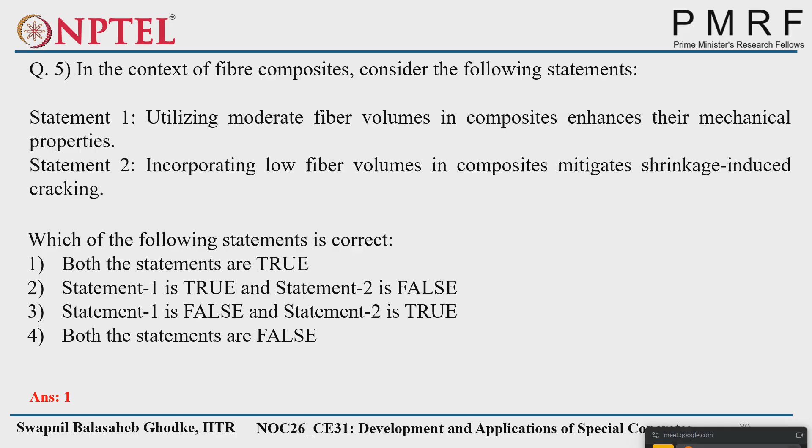Because flowability can be achieved by increasing the water to powder ratio. Water to powder ratio means water increasing while keeping powder constant, or otherwise keeping water constant while decreasing powder. So automatically flowability will get increased. And addition of superplasticizer increases the flow, it does not improve cohesiveness. For cohesiveness, viscosity modifying agent is used, or otherwise you can improve the fineness content. These two you can do for increasing the cohesiveness. So that's why statement 2 is false and statement 1 is correct.

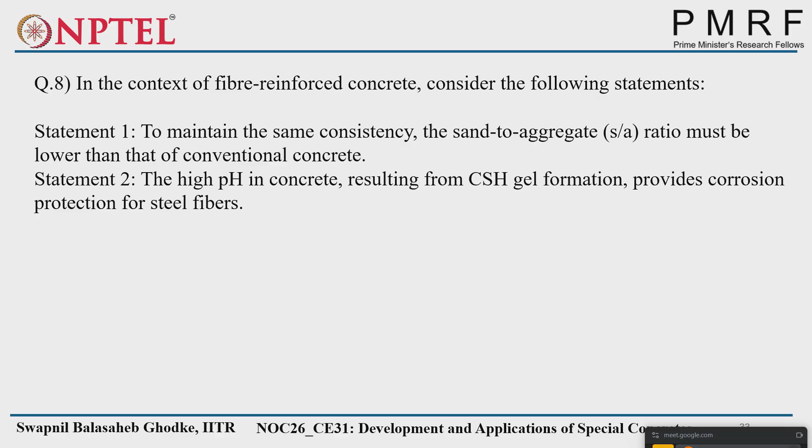The high pH in concrete resulting from CSH - the pH content is not resulting from CSH, it is resulting from CH, calcium hydroxide. That provides protection for steel fibers. CSH doesn't create pH or improve pH. Only CH content improves pH and other alkali content. That's why statement 2 is also wrong.

Because this CSH gel doesn't provide any alkalinity, because of only one word the sentence is wrong. The source of the enhancing pH is CH, calcium hydroxide, not CSH. Understood?

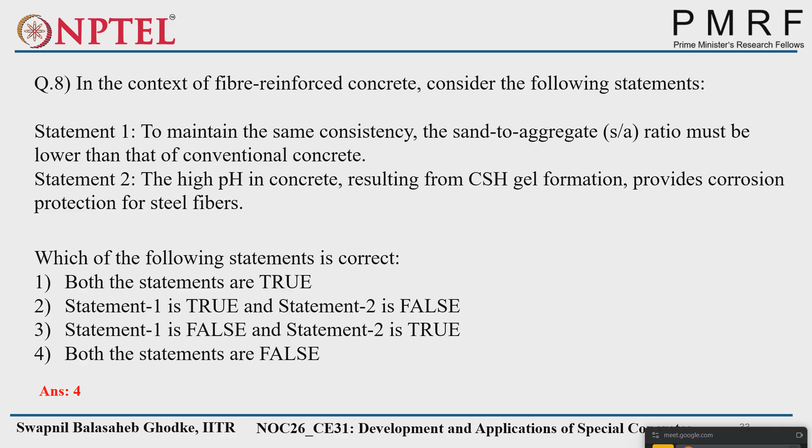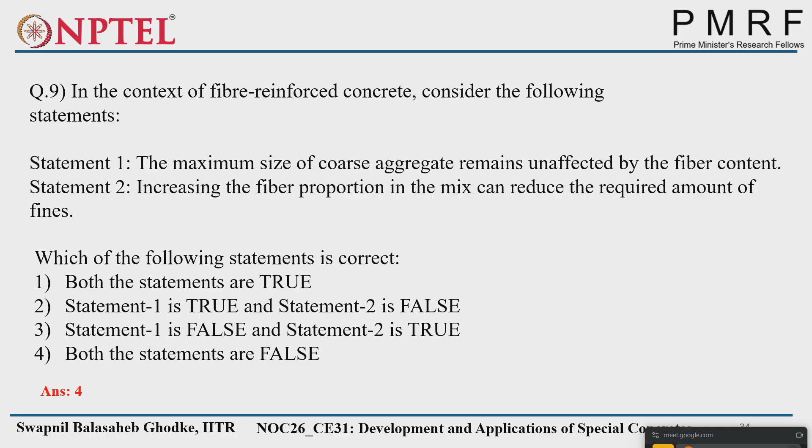Then, increasing the fiber proportion in the mix can reduce the required amount of fines - no, we require more fines because of increasing the overall specific surface area, and to carry all the fibers and the coarse aggregate along with the concrete matrix in the flow. So that's why both statements are wrong.

In the context of FRC, statement 1: amount of fines required in the mix could reduce if the proportion of fiber increases. Okay, it seems to be repeating. Yeah, the previous question and this question are the same.

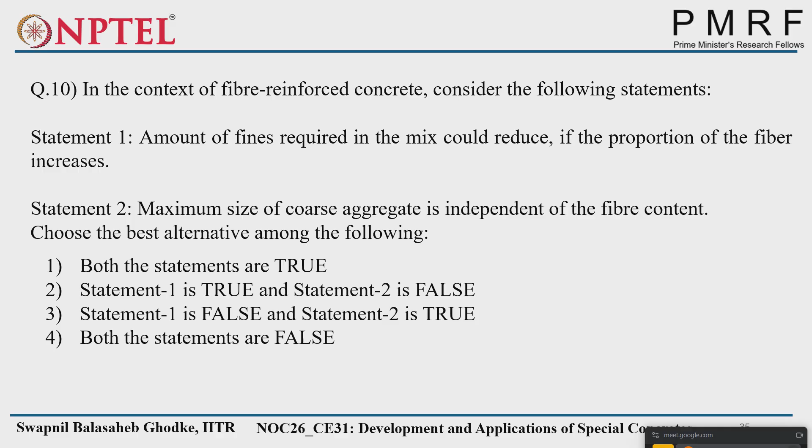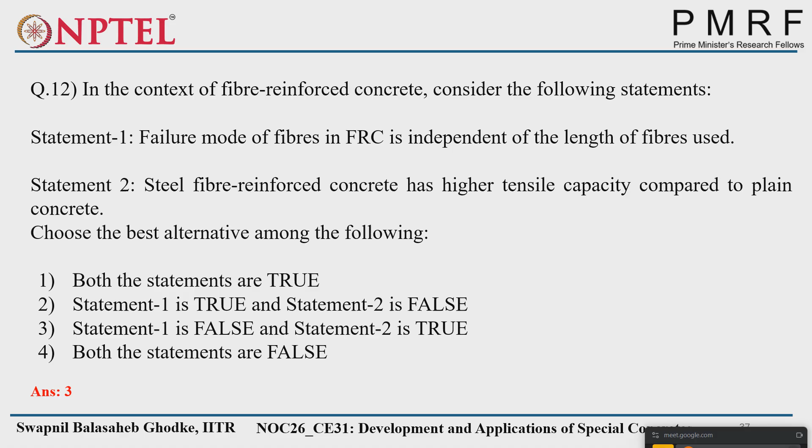So all these questions are from week six. I hope you got some overview of the week six lectures. If anyone has any doubt, please let me know, or then you can solve assignment four also, and now assignment six also - we have to solve two assignments, right?